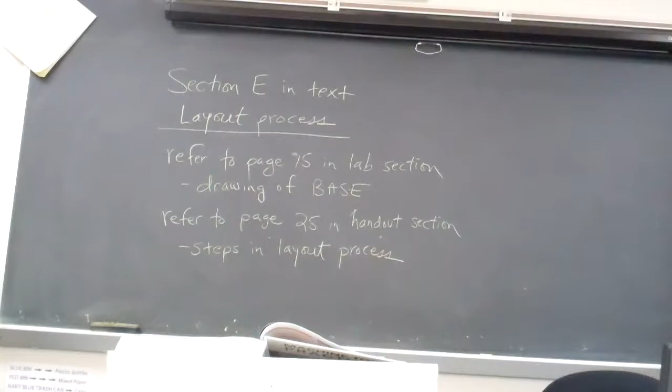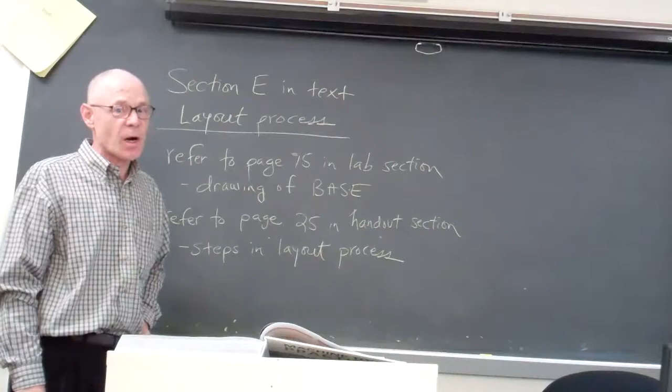This will be a short video to talk a little bit about the layout process, which is what you're going to be doing next on the base part that you've already milled.

Here's a few things you'll need to reference. Specifically for this video, you're going to need to get out page 75 in the lab section, which is the drawing of the base, because the base is going to give you a lot of information about what to do. John will separately talk to you about the layout process as part of the lecture, and there are some notes for that on page 25 in the handout section.

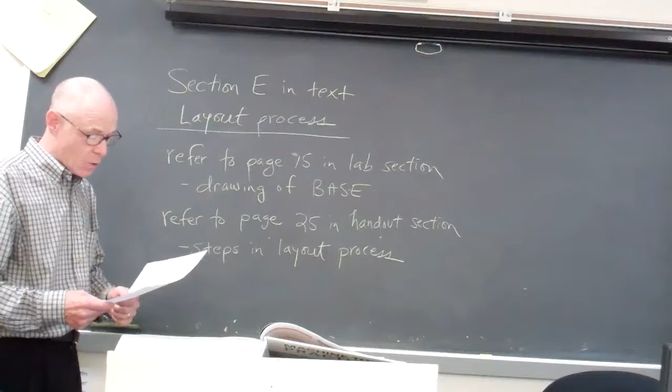So first off, if everybody could open up to your drawing of your base, then we'll be using that over the next few minutes to describe what it is you're going to be doing.

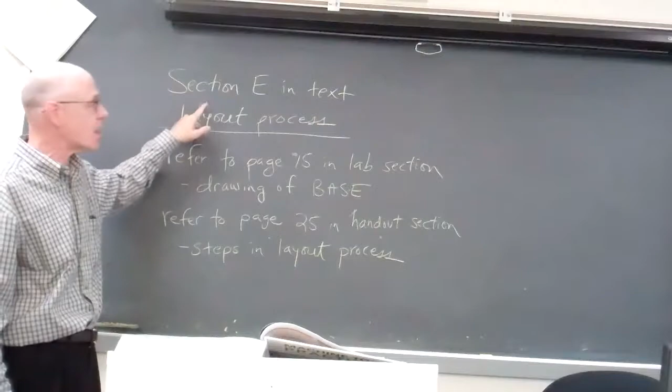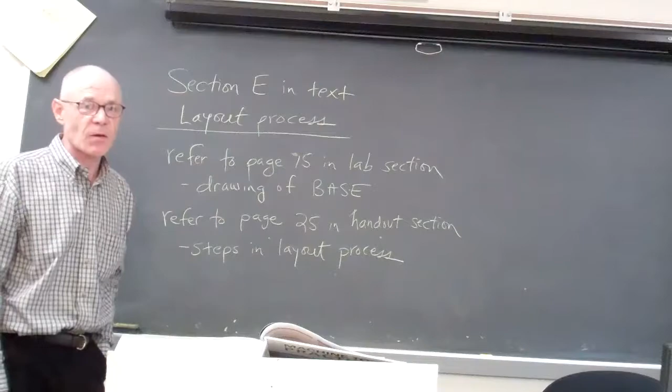And while you're getting that out, one more thing. The chapter in the textbook, section E, is what discusses the layout process itself. We're mostly going to be dealing with precision layout, which allows you to identify locations within plus or minus thousandths of an inch.

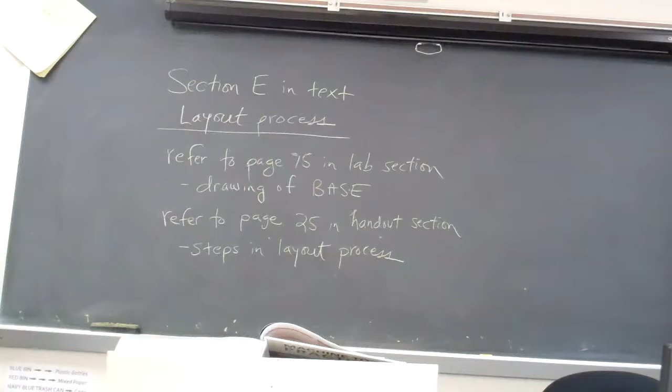Okay, before we proceed with showing some operations with the layout process, there was a question about the surface plate. This is your granite surface plate, and I just want to mention briefly the proper way to place objects on the surface plate and the proper way to remove them.

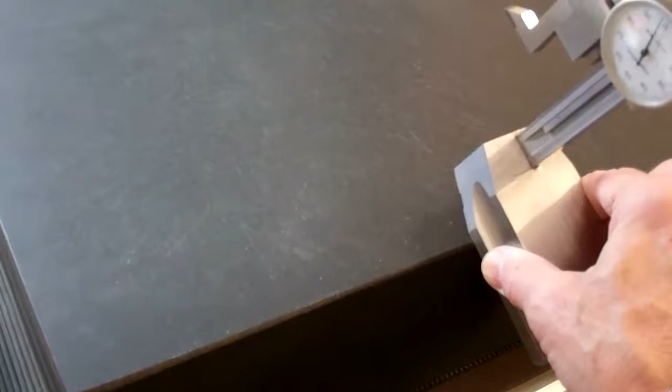So here's, for example, let's say a height gauge. You're going to use a height gauge on the surface plate. The proper way to do it is you rest the height gauge on the side and you rock it up and then slide it on like that. And the same thing is when you're removing it, you'll slide it off like this.

Now what's the purpose for doing that? This is a granite surface plate, so granite is brittle and it can chip. So we don't want to be causing any marks or any damage or nicks or chips by just placing something right straight down on the surface plate.

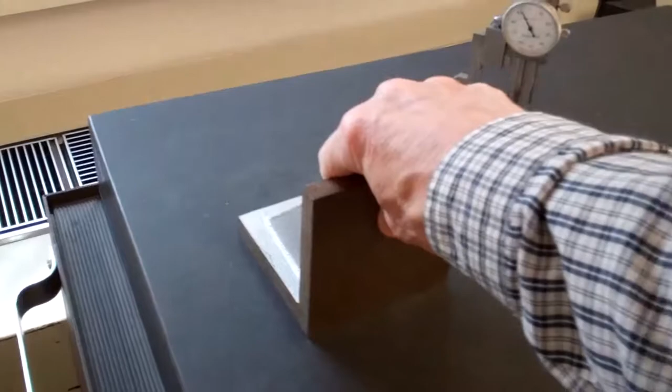Another object that you may use is an angle plate. A couple of your groups have used this already. So an angle plate, again, you would rock it up and slide it off, and then when you remove it, you would remove it like that.

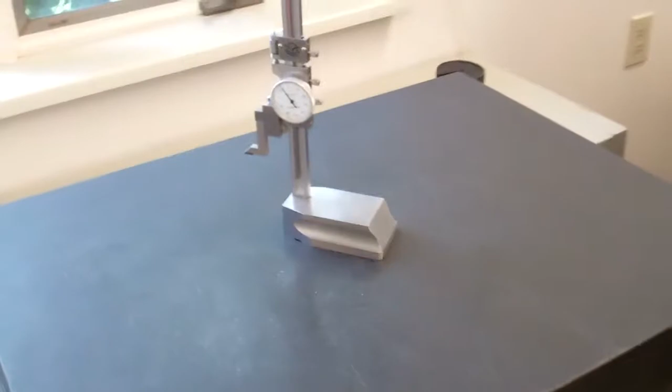Also, this goes for parts as well. So here's one of the base plates. So if you're going to put the base plate on, then again you would rock it up and over and then slide it on like that and remove it the same way.

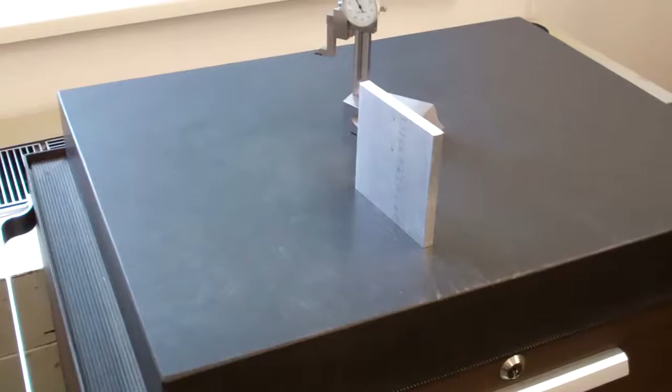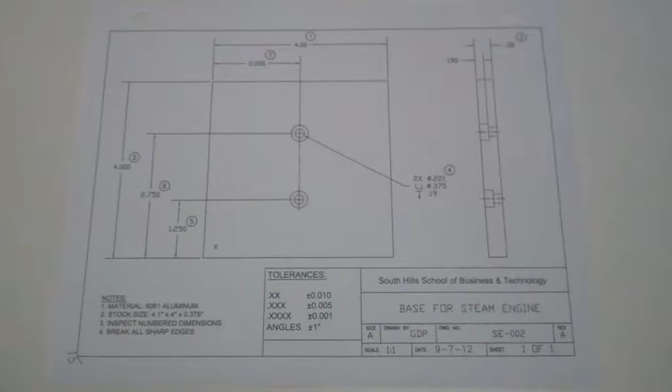Let's now talk about the drawing of your part. The reason we're doing the layout process is because before you drill these two holes in the base plate, you have to identify their location accurately on the part. The drawing tells you all the dimensions that are important here.

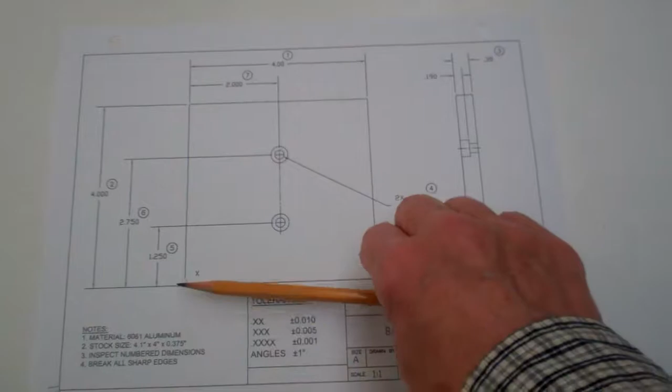And you'll also notice that these dimensions are all referenced to this lower left-hand corner. All the dimensions come off the left side, from the bottom and from the left side.

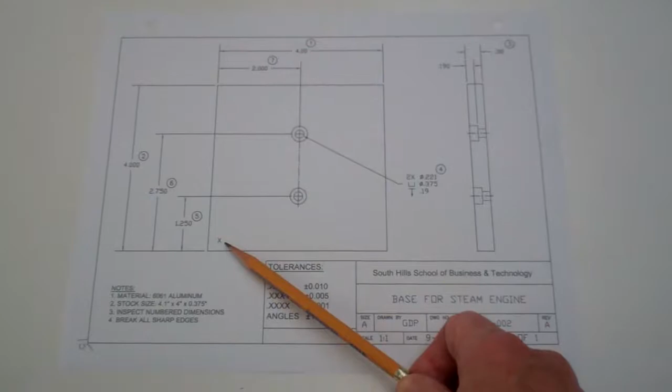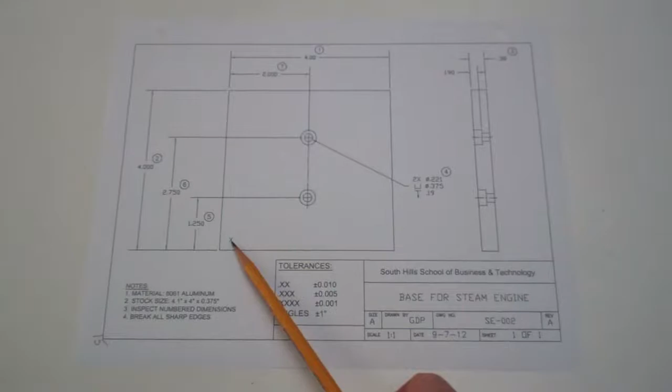So there's something on this drawing that you probably won't normally find on a drawing. If you look in the lower left corner, there's an X. So what does that X mean? Well, that X is like a reference mark for you, so that when you're doing the layout, you're making sure that you're locating the holes correctly from this lower left corner, which again is the reference corner for all the dimensions on the drawing. So what you're actually going to do is you're actually going to punch some kind of a mark in that lower left-hand corner, a permanent mark, so that you properly do the layout.

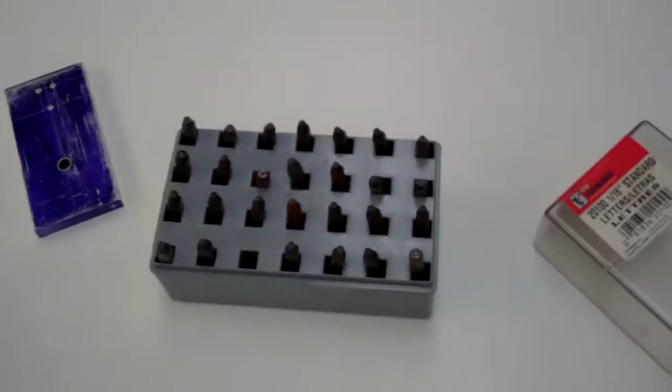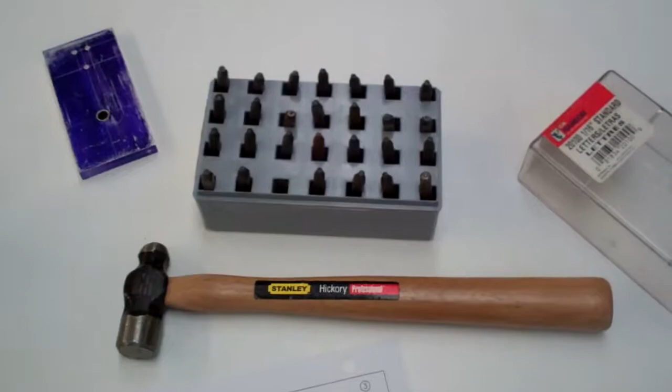So to do that, you have some punches here. We have a set of lettered punches, the whole alphabet, and a hammer. You're going to actually just, and of course this is soft aluminum, so these steel punches will easily put a mark in there. So you pick whatever letter you want and go ahead and punch it in the corner.

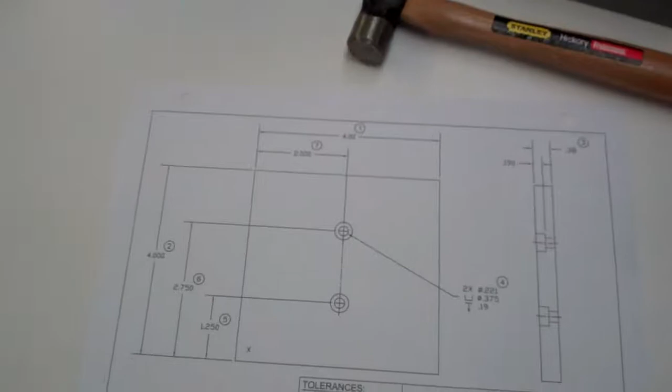And this is something we need for the lab, but you can certainly, if John has time, you can do it during this class. We have several hammers and also those punches. All right, and no injuries, please.

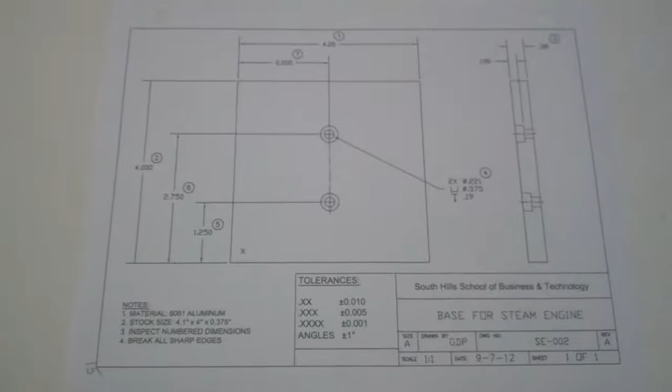All right, so the next thing that's going to happen is once you're all set with your reference mark, then we can apply what's called layout fluid. So let me show that to you here.

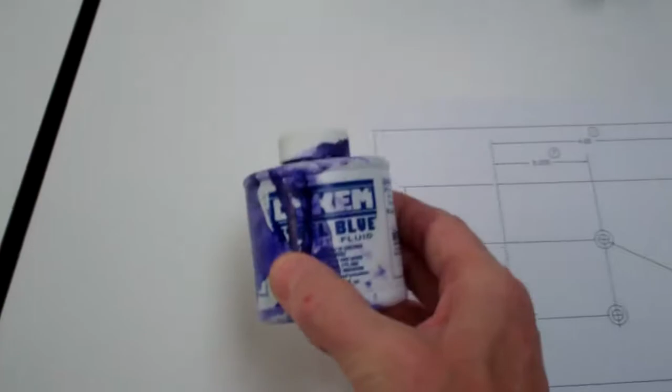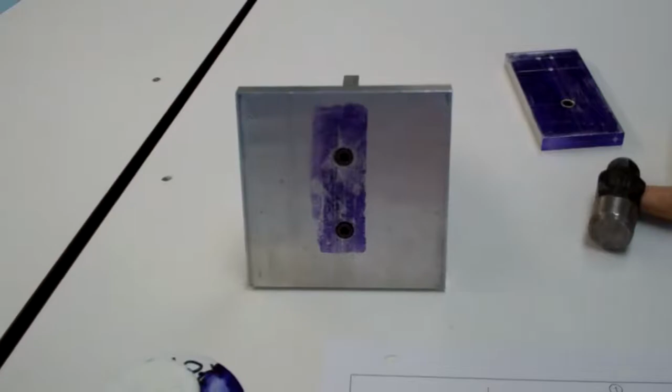Okay, so the layout fluid comes in these blue containers. This is a company called Dykem, and they make other colors besides blue, but we usually get blue. If you look at this demo engine on the bottom, you can see the blue layout fluid was painted on the bottom, and in the general area where those two holes were drilled. The purpose of the blue layout fluid is to highlight the scribe marks, because you're going to use a scriber to mark the exact location of the hole.

The blue layout fluid just allows the scribe marks to be highlighted and easily visible. Otherwise, you could still see them, but they would not be as visible on plain aluminum.

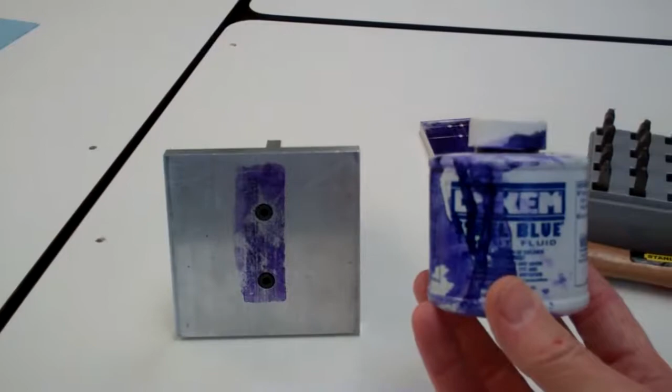So this is something you want to do outside. You just take your part and the layout fluid outside, paint the fluid in the general area where the holes are going to be, and of course you know from your drawing where that is. Then you just have to wait 3 or 4 minutes outside for it to dry. Otherwise, if you do it inside, it has a smell that we probably don't want inside.

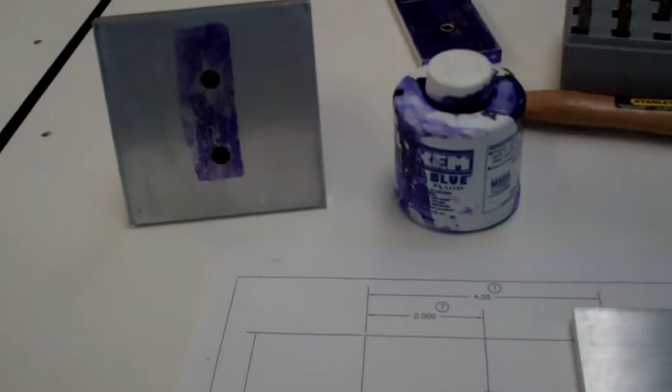Again, if you have time during class and it's a nice day outside, everybody can bring their part and the layout fluid outside and apply it. That'll just be an extra step that we don't have to do in lab. You'll be all ready there.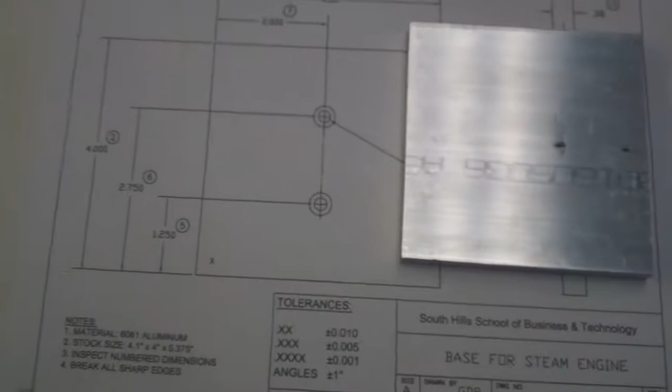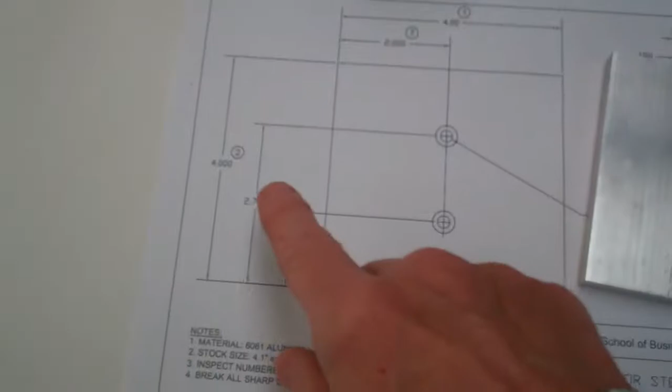Now getting back to your reference mark that you're going to be punching, how do you know what corner on your part? Well, all you have to do is compare your part to the drawing. You can see there's one dimension here, the 4.00, which we measured for information, measuring across the two sides you did not machine. And then the other 4.00 is the dimension you did machine, across these two sides. So you just have to orient your part to match the drawing.

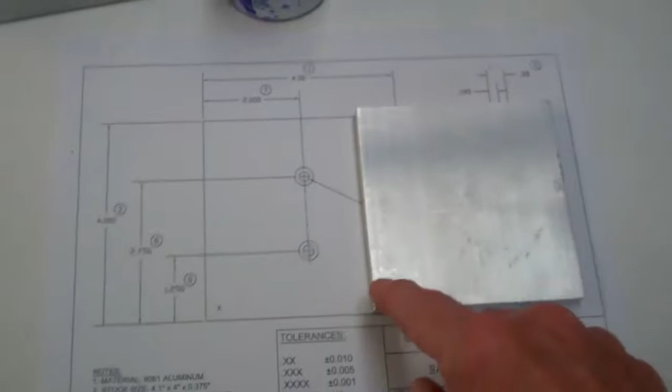In this part, the punch mark would be in the lower left corner. Now, if you would prefer to have it here, you're punching on the side that's going to be down on the table, and it won't be visible when your engine is running. So you just pick whatever side you want. You could punch here, or there, or the two corners on the other side.

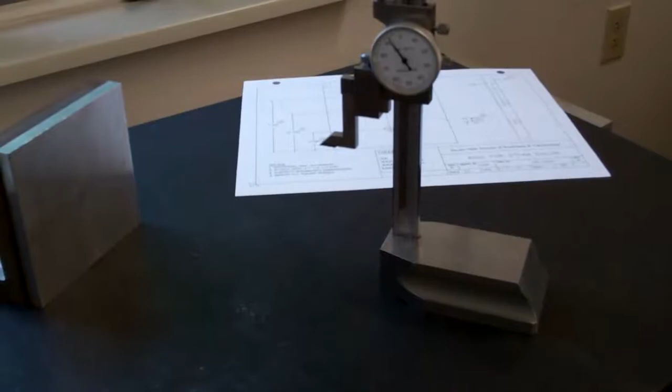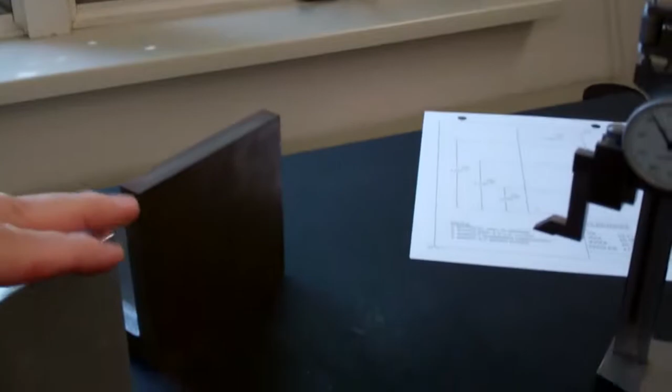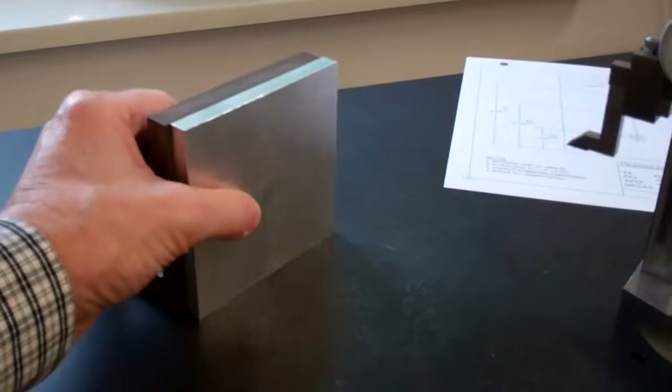Now let's talk a little bit about the height gauge and the scribing of the locations. Once you have the layout fluid applied, you're going to do all of the scribing over here at the surface plate, and you want to have your drawing with you. You'll also notice here's a base part, and I also have the angle plate. The only purpose of the angle plate is, as you're scribing the part, it's just a way to steady the part, because otherwise it's very unsteady and you may not get an accurate result. It's just a way to stabilize and hold up the part while you're scribing.

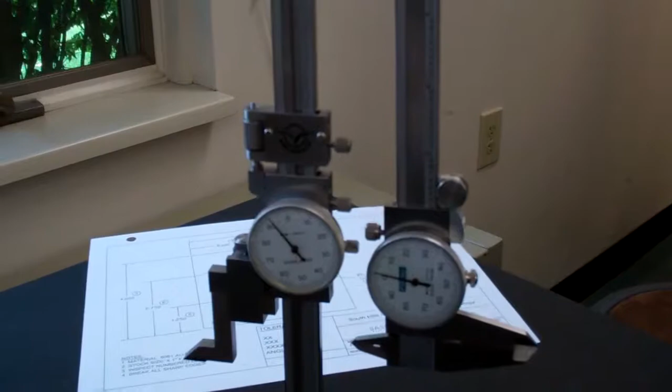Now the height gauge, I don't know if we've talked about it much in lab. The height gauge is actually very similar to the calipers. If you compare the two, the scale on the beam and on the dial are exactly the same. The height gauge has a range of 8 inches. This particular caliper is 6 inches. There are 8-inch calipers as well. So the reading shouldn't be a problem.

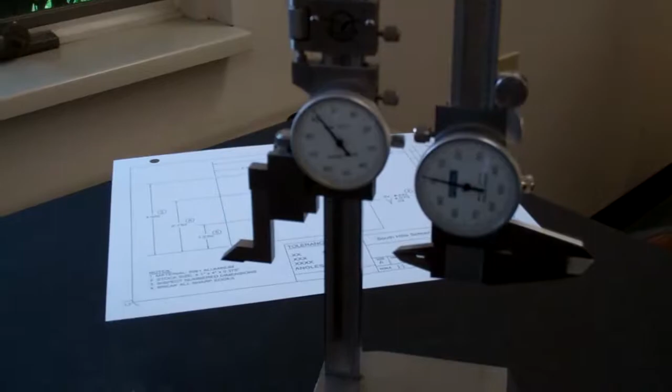Now in terms of zeroing it, when you first use a height gauge, you want to bring it all the way down so it touches the surface plate, and just check that the reading is 0. If it's not, you can adjust the 0 the same way you would adjust calipers.

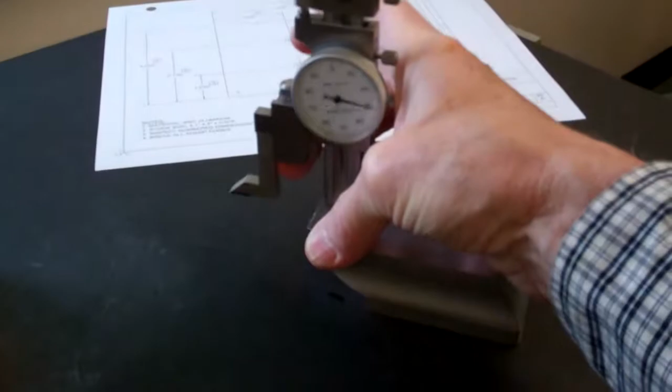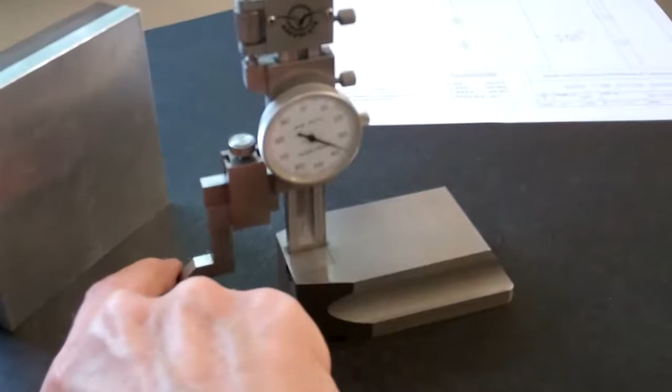Now, the reason we're using the height gauge for the scribing is if you look at the measuring surface of the height gauge, there's a very sharp pointed scribing edge right here. It's actually a little carbide tip on the height gauge. So we're going to use that sharp edge to scribe locations across the part.

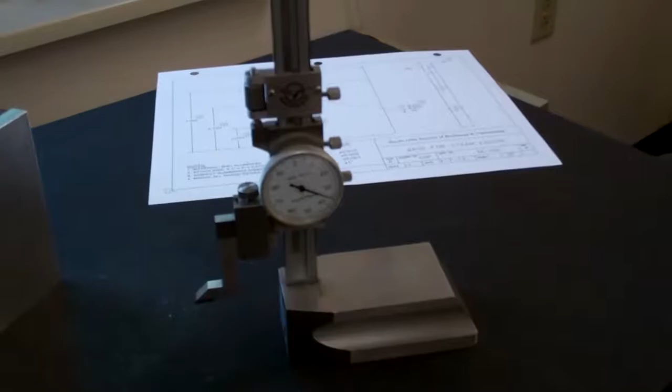For this step, don't do this step here in your regular class. We're going to do all the actual scribing of locations during the lab, and we'll do it together.

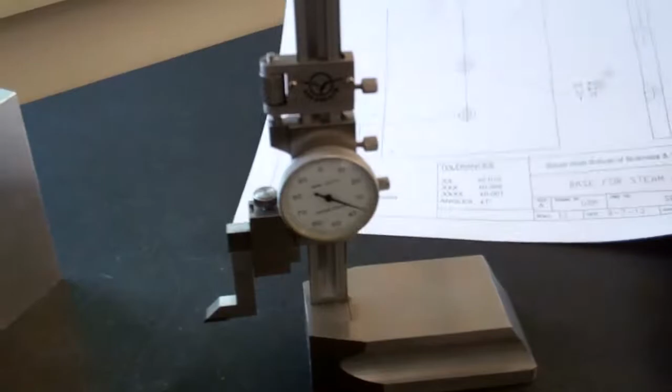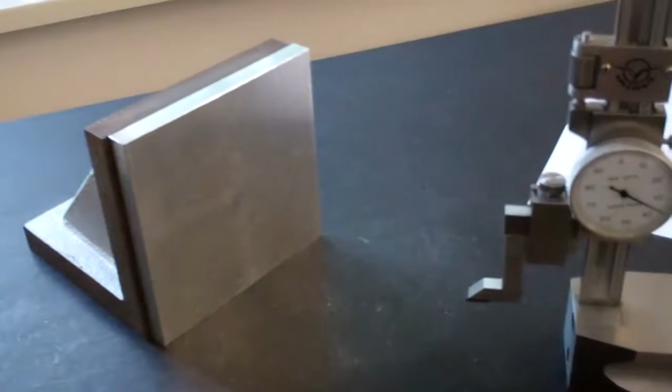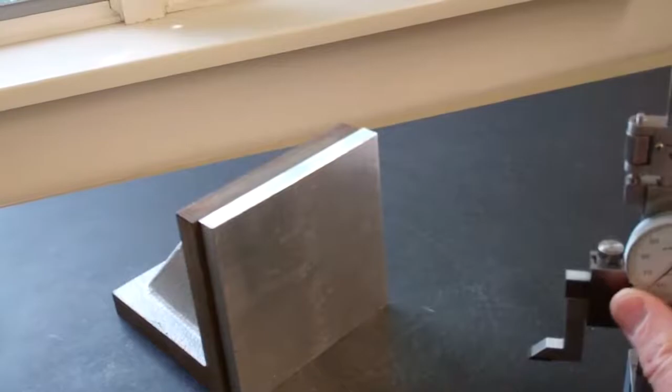There's another feature of the height gauge which allows you to set the dimensions exactly. So if you look at your drawing, let's say we're going to start with your reference mark that you punched down here in the lower left corner, and your layout fluid would be applied right here. So if you look at the drawing, inspection point number 5 says 1.250. We're going to set the height gauge at exactly 1.250 and then scribe across. And then the next one you might do is the 2.750, set the height gauge and then scribe across. Then you're going to rotate the part and then scribe the other dimension, the 2.000.

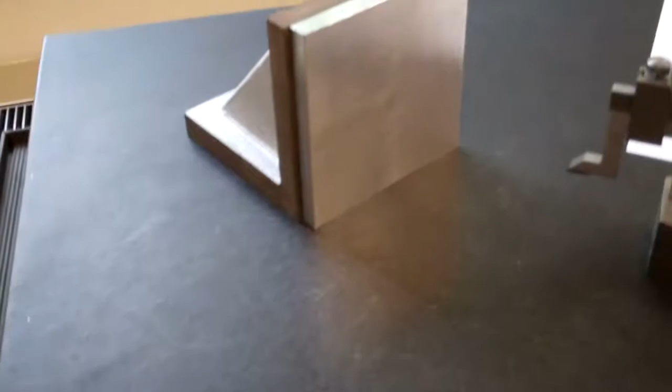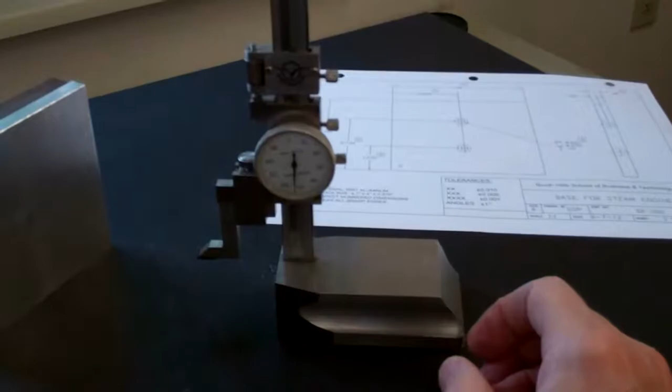So here's how you would set the height gauge. What you're going to do is you can just manually bring the height gauge to 1.250 or close to it. You won't get it exact. Let's say I bring it right about there. Okay, then there is a set screw right here that you would tighten, and then there's a thumb wheel right here which would allow you to do your fine tuning.

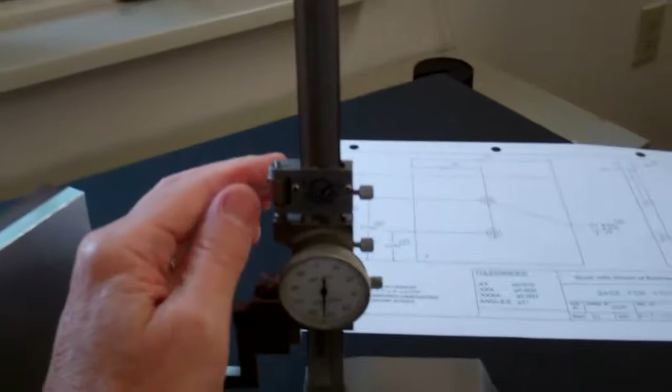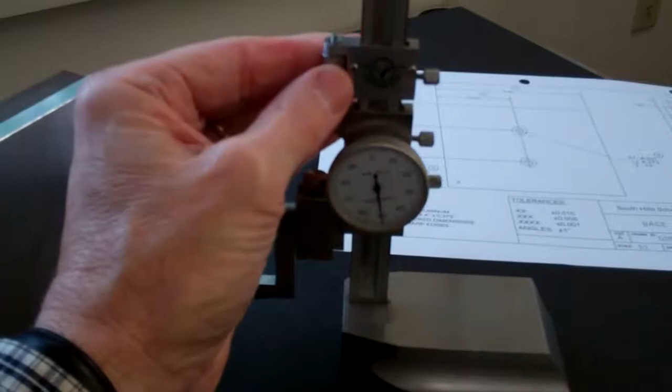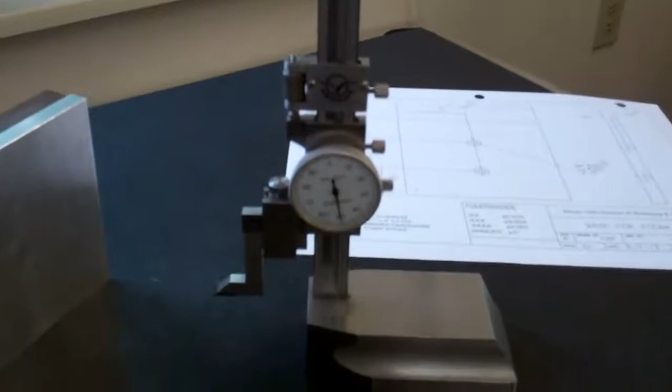You can actually fine tune it so that it's exactly 1.250. Right there, and once you get it exact, then you tighten. There's another second set screw down here which locks it in. So you've locked the instrument exactly at 1.250, and then you go ahead and scribe.

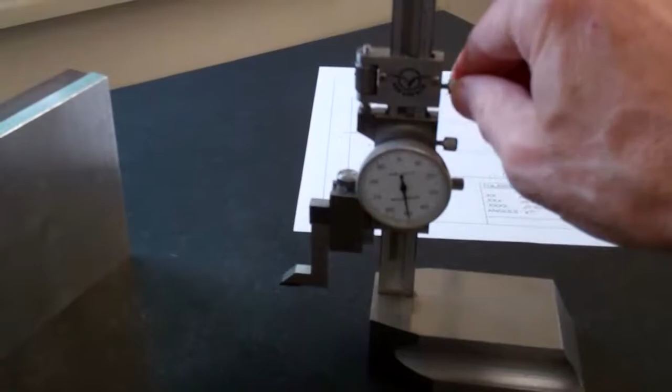And then you make sure, before you try to move it, you unlock it so that it moves freely, so you're not forcing the instrument. And then you go on to your next dimension, in this case the 2.750.

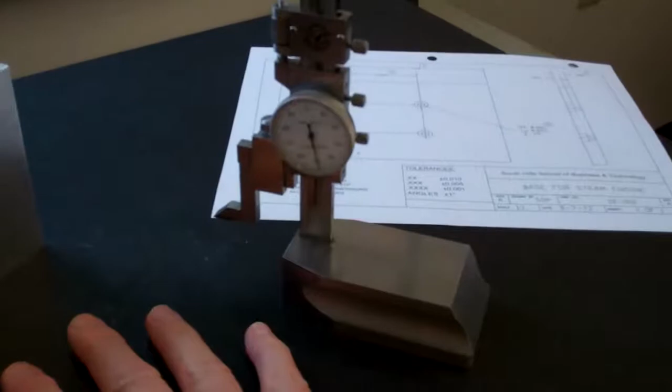Now you also don't have to scribe all the way from one side of the part to the other. You only have to scribe in the general area where the hole is going to be. If you did scribe all the way across, it won't matter. Remember, this is the side of the base that's going to be sitting down flat on the table when your engine's put together, so nobody's going to actually see what's down there.

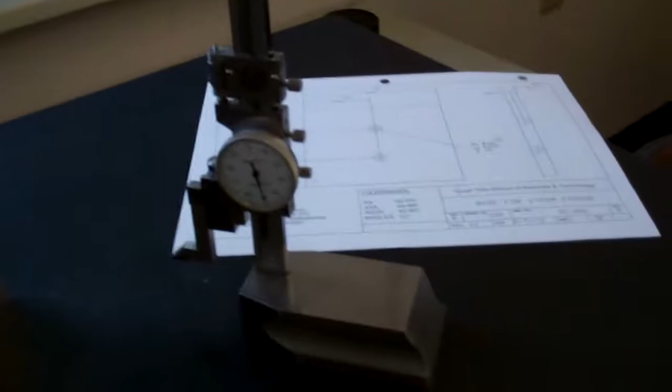All right, so again, leave the scribing for the lab, and then this week we'll be doing the drilling of those locations. Now, what happens after you scribe? Well, there are several more steps after you do the scribing, and I'll talk about those in a minute.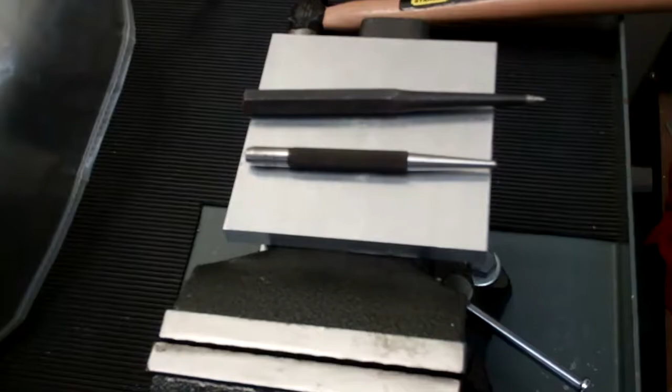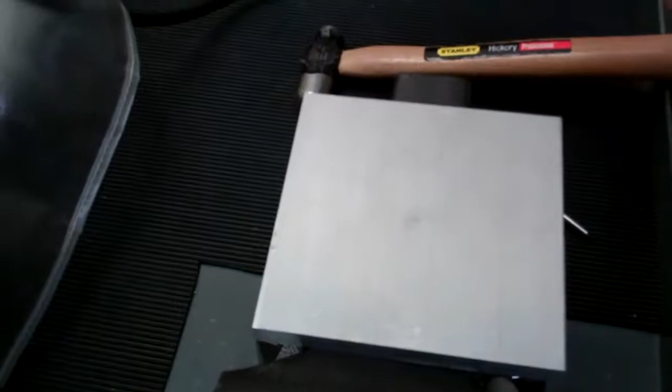All right, so the last step before you actually do the drilling is you're going to use several punches to punch your scribe locations, and the textbook talks about these. So you have a layout punch which has a very sharp point, and I think that's more like a 30-degree point, and that's going to be the one you punch first. So you're going to, as accurately as you can, locate that point at the intersection of your two scribe marks, and then you'll use the hammer to punch a mark.

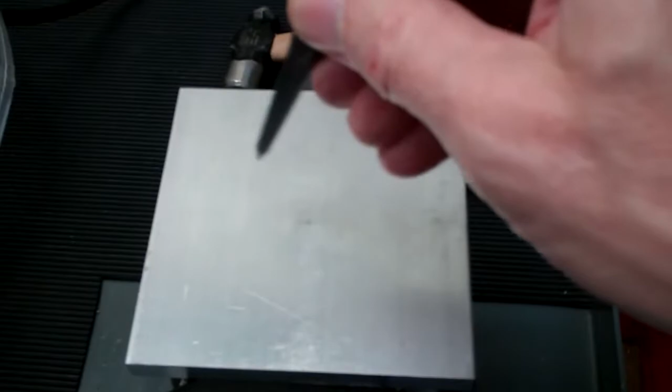And if you have to use a magnifying glass to get it exactly right, sometimes you actually can feel the intersection of the scribe marks with the punch. And then you follow that up with a center punch. Center punch has about a 60-degree angle, and then you'll punch the same location right over your first punch. That just kind of enlarges the hole and prepares for drilling.

So the punch marks make it easier to line up your drill when you go to actually drill that location, and it helps to prevent your drill from wandering a little bit. So that's the punching. So those are all the steps we'll do before we get to drilling.